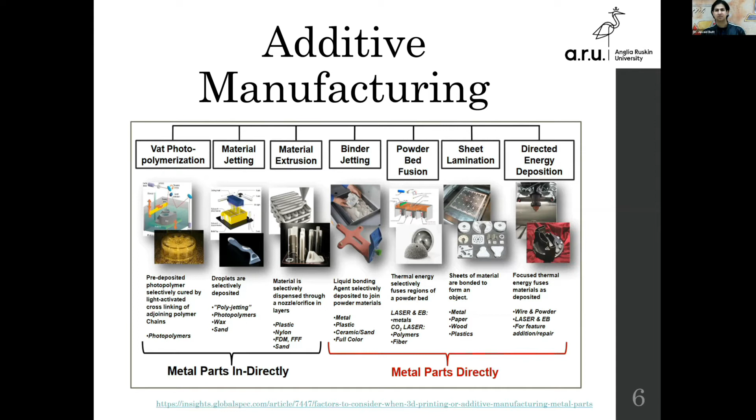One recent development I would like to share with you is this dress that you see on the screen. This is known as a proximity dress that has been 3D printed, and I'm sure there will be new styles coming. Currently there is only one dress that you see on the screen. What it does is it is incorporated with sensors and actuators.

Upon recognizing the social distance parameters that we have to abide by according to the UK government regulations right now, you can very easily identify when you are invading somebody's personal space or somebody's social space. That gives you an indication that it is time to back off and not go into somebody else's social space that might increase the risk of the spread of COVID-19.

Again, a very useful thing that has been developed, and this is one of the main features of additive manufacturing. It allows you the freedom of design - you can pretty much design anything as long as you can make a 3D CAD file of it.

It gives you the freedom of choosing different materials that you can utilize. It is very rapid and allows you to manufacture different products and reduces the lead time from the design stage to the production stage. As I said, additive manufacturing is one technology that I don't think I have to go into much detail about, because we have all seen the impact that it has on our lives.

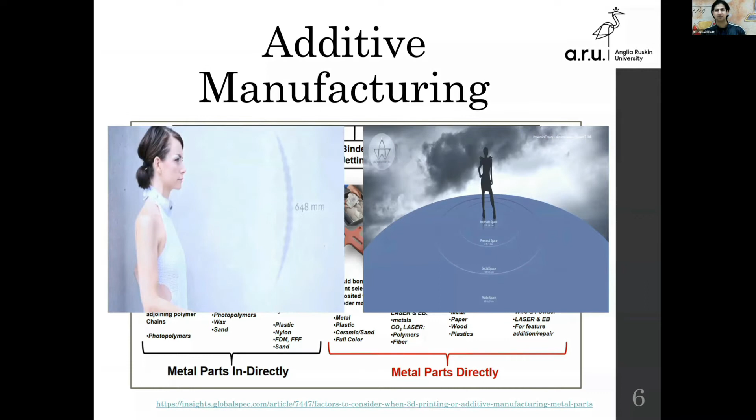So with that, let's move on to augmented reality - again, one of those technologies that is gaining a lot of momentum, a lot of steam, mostly owing to the fact that you can augment a 3D object in your own physical space and you can play around with it.

For example, what you see on the screen is this gentleman currently looking at different aspects of an exploration site, where he doesn't need to be there physically, but he can still look at all the different aspects that are there.

Augmented reality helps a lot when it comes to training new employees and enhancing their capabilities. Research has shown that the performance of employees increases drastically if they are developed through augmented reality. It also helps to optimize the production flow.

These technologies are quite fondly used in industry with the use of some hardware, and there is a specific example that I will go through toward the second section of the presentation.

The combination of augmented reality with virtual reality adds a bit more applications to the mix. So now, in addition to having a 3D augmented version of something in physical space, you can enter a virtual space as well. These technologies make quite a difference in industries, specifically with regards to assembly operations, because if you can augment different aspects of the assembly operation, you can do that fairly quickly.

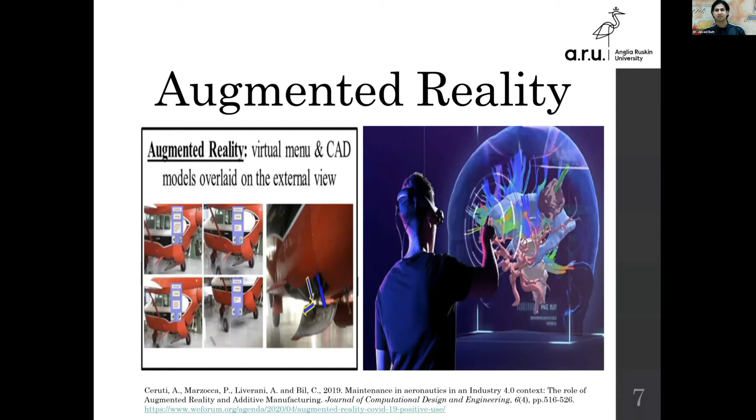Then let's move on to the third pillar, which is simulation—again, something that has been used in engineering for the last few decades, I would say. What simulation does is create a virtual environment where you can see how your product or process would behave under different conditions and different boundary conditions that you can apply.

For example, what you see on the screen right now is a product being heated between two heating plates. One of the heating plates is on and the other is off, and you can see the temperature distribution with time as the simulation runs.

These are very helpful because sometimes, even if you run an experiment, certain aspects are hidden from the naked eye, or even from an experienced observer. These simulations allow you to go into every crack, every aspect of your product or process, and identify problems that you might overlook otherwise. So they're a very useful tool.

But one thing we need to be careful of with simulation is that it should always be validated—there should always be an experiment accompanying a simulation to make sure the difference between simulation results and experimental results is within an acceptable range. Without that, you can simulate pretty much anything and get a result out of anything. There's a saying we use a lot in simulation: garbage in, garbage out. So you want to avoid that scenario, and you should always validate your simulations through experiments.

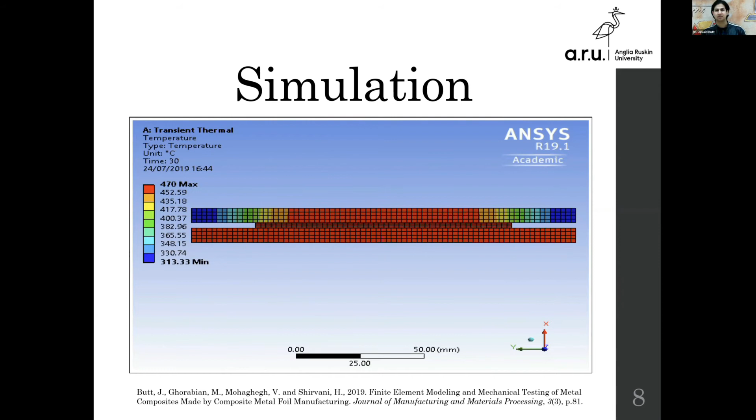All of the work I'm showing you is my own work, and it has been validated through experiments. So this right here is a simulation where I will run it, but let me first give you a brief idea of what I'm trying to do here.

In this case, I have a container with water inside of it. This white thing you see in the middle is a device. I want to know whether this device will stay at a constant temperature, because that's needed for a specific application. One way I've identified to achieve that uniform temperature is by pushing a stream of cold water from the bottom of the container.

If you focus on the right-hand side, the bottom will be sprayed with a stream of cold water, and on the left-hand side you can see the temperature changes as that stream fills through the already available liquid in the container. On the right-hand side you'll see the velocity magnitude as that stream continues to run.

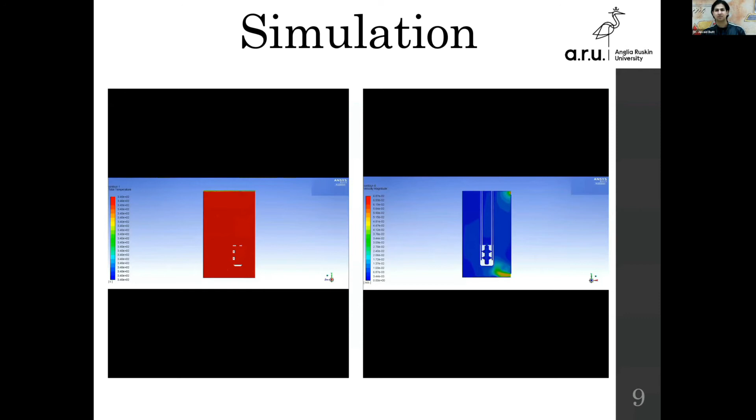Let me just play this, and I want you to observe how these contours change, so you can identify exactly what is happening at any given time and make an informed decision about your experiment. As you can see, the stream starts from the bottom, and as it does, on the left-hand side you can see the temperature coming down.

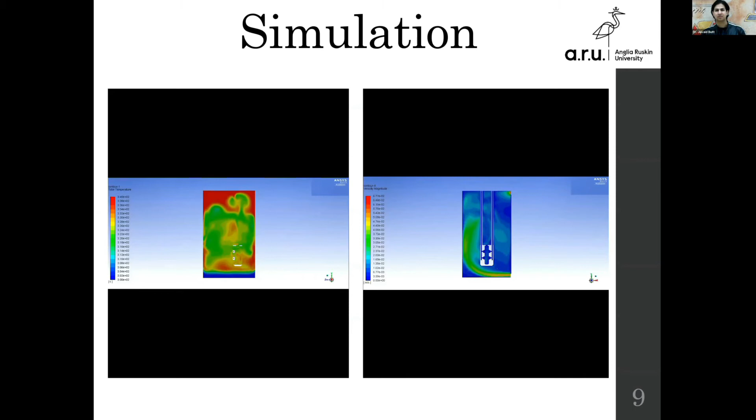The red aspect is the high temperature, and with the velocity contours, you can see the different temperature changes. So now the device in the middle is at constant temperature, and that is what I can get running a simulation for a few seconds. This gives me the confidence that my idea is correct.

Now I can move on to the next phase, which is validating this simulation that I have just run to ensure that I am on the right track. So it is a very useful tool when we talk about product development or product optimization. And not just products, there are manufacturing processes out there as well that need optimization.

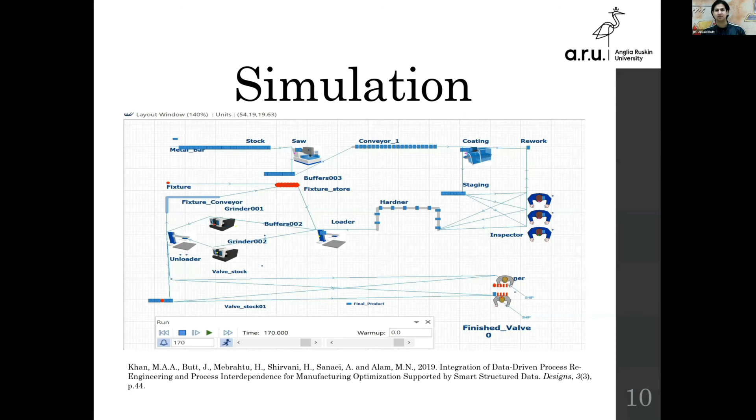Moving on, we have autonomous robots. Again, these are not new technologies. We are all quite familiar with robots, and we have been using them in companies for decades now. Autonomous robots add a little bit more to it. What that does is it allows the robots to be more self-aware. They should be able to self-configure, and this will allow a level of autonomy to the robot, so that humans should only be working as supervisors and not necessarily be on the production floor doing these operations.

There is another class of robots that has popped up, which is making a huge difference to the industrial sector, and those are known as cobots, or collaborative robots. What they do is they augment the human capabilities that humans can do within their own physical limits.

Humans can be working with a robot on the same product, or robots can be used by humans. For example, an exoskeleton is a prime example of that, allowing humans to lift more than they are capable of in terms of weight. These cobots allow humans to do more, to be more. An automated guided vehicle is again a very good example of that. Notwithstanding the inherent advantages of robots, like increased productivity and increased performance, all of these get added together with cobots, and we can now do quite a lot more with these autonomous robots than we could have done in the past.

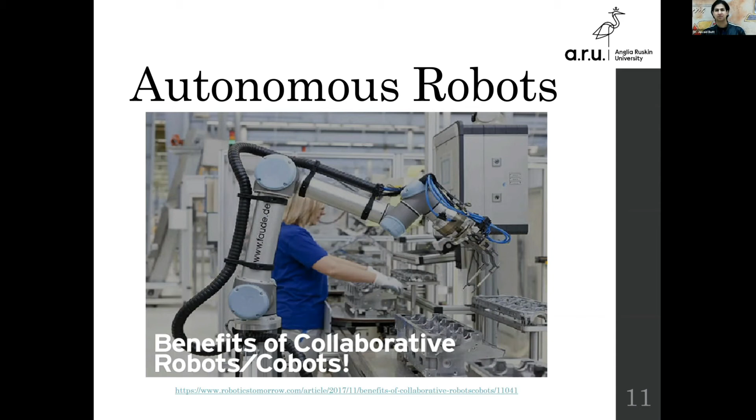So the next one on the list is Internet of Things. Now you might be thinking that even to this point, the four I have just discussed seem a bit scattered, like one thing and the other. Now the next four I'm about to talk about should be very much in conjunction with each other, because they complement each other very well. It is not to say that we cannot incorporate the other four I just discussed, it is just a matter of finding what fits within your organization. As I said, it is not a one size fits all kind of scenario.

So you need to pick and choose what you want and how that will impact your business.

As far as the Internet of Things is concerned, this is with regards to the interconnectivity of our usage, the interconnectivity of different systems, different devices, different machines, and the data that we collect from these machines, along with the interaction with humans. All of that is encompassed within the Internet of Things.

Its use in manufacturing is termed the Industrial Internet of Things. It allows you to do quite a lot, and it allows you to get to the point where you can utilize that and get a lot of benefits out of it.

So one of the main aspects of the Internet of Things is collecting data. When you connect a number of sensors with your existing system, let's take a very simple example. This is one of the examples that has been used as a hallmark of Internet of Things, where legacy systems have been transformed into digital systems.